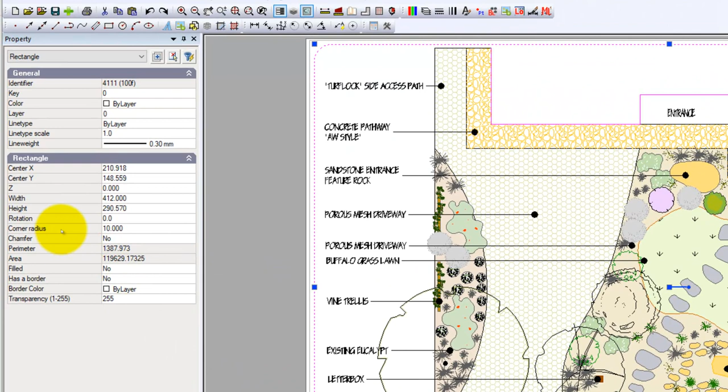You might want at a later stage to make that color 255 so it disappears from view on the sheet. Let me demonstrate that. You could simply pick color 255 and the edge of the floating viewport won't show. And let me unselect, or what I have done here is just put a rectangle with a corner radius, and I've given it a thickness of 0.3 millimeters on that sheet.

Now let's go back and select the floating viewport. Notice the view scale 68.11. It's not to scale, and we could pick a fixed scale, and if I picked a fixed scale of say 50, it's going to magnify the view and we will lose what we want. So this A3 sheet, this is how we want to lay the drawing out, but it's not going to print to a fixed scale.

In most parts of the world that use the metric system, your scales should be 1 to 50, 1 to 100, 1 to 200 and 1 to 500. Just don't have these odd scales because it makes no sense. But we can print this drawing accurately to a fixed scale by simply using a different size sheet. So I went to Format, Layout, and I created a sheet which is A2 in size.

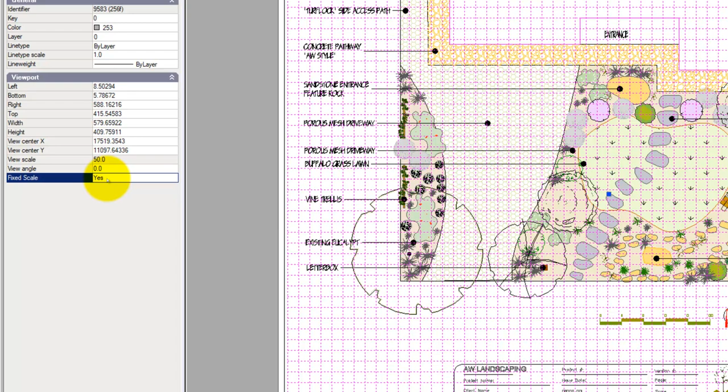Let me just select the tab and go to the Layouts Manager and see here it's an A2 sheet. So we're viewing now an A2 sheet, not an A3, and I'll do the same as I did before. Pick the grey outline there, and notice here it's a view scale of 50. So we can say, do we want to print it as a fixed scale? And the answer is yes, and now we can print it.

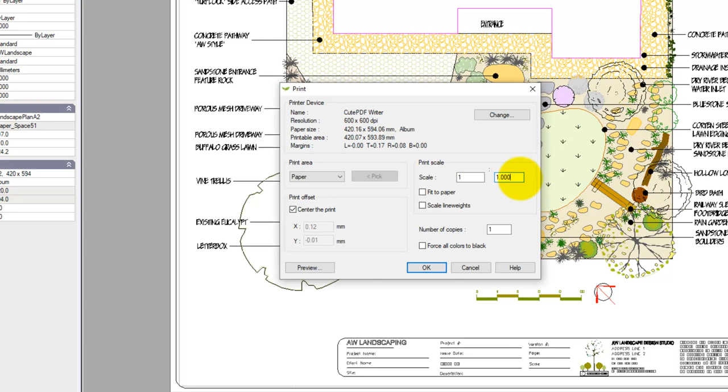So let's go File and Print, and I've set as my printer a CutePDF Writer, but there are a number of other PDF writers you could use. Notice that I've got Fit to Paper ticked at the moment, and the scale says 1 equals 1004. We want it fixed scale, so we take that off. We're now going to print 1 to 1, so print directly onto an A2 sheet, and it will give us exactly a scale of 1 to 50.

So it's now printing, and we'll put it on the desktop as gCADPlus drawing, and we'll save it. I've done a test, and let's now go to the desktop and open that gCADPlus drawing. Here it is, and I'll open it with Adobe Acrobat, and there's our nicely produced drawing.

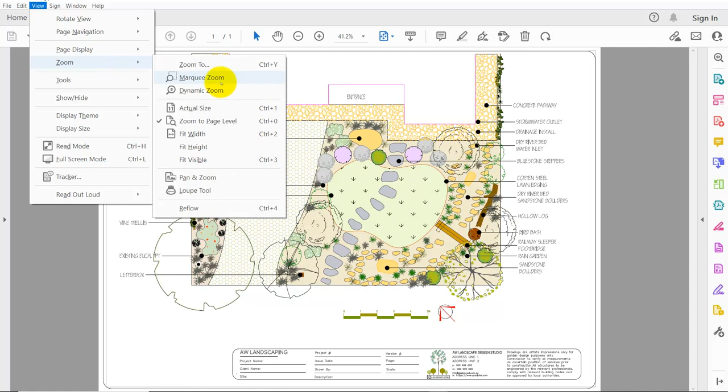Sorry for emails coming in. I'll go full size here, and because it's a PDF file, it's written at high resolution, and we can go View, Zoom, Marquee Zoom, and just zoom in, and you can see the very fine level of detail that we've got in this print. So it's very easy to print to a fixed scale.

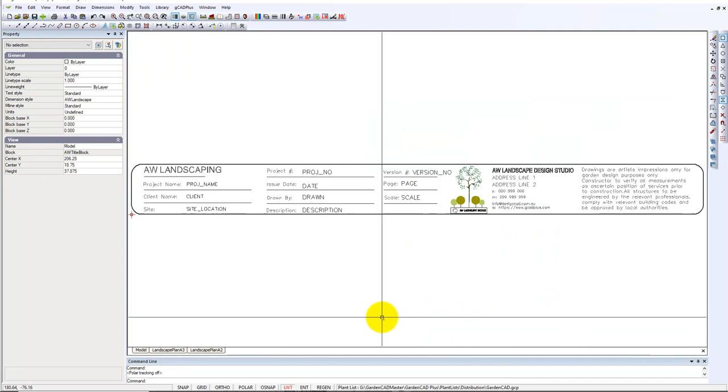So we could go back now into gCADPlus and dive back into, no, not modelspace. I want to now dive into the title block in there, and I can edit it, and so we can now overtype this, and I've said here enter the scale, e.g.

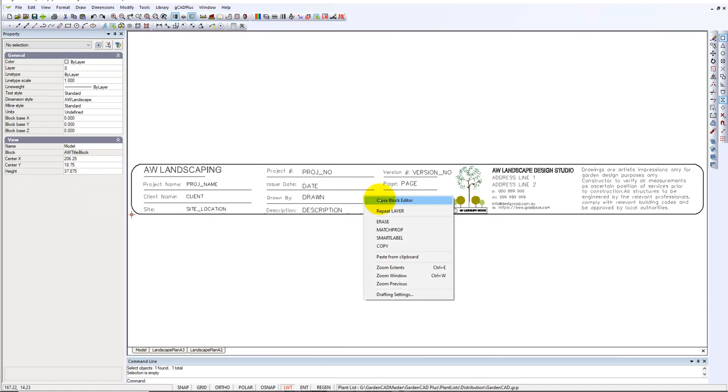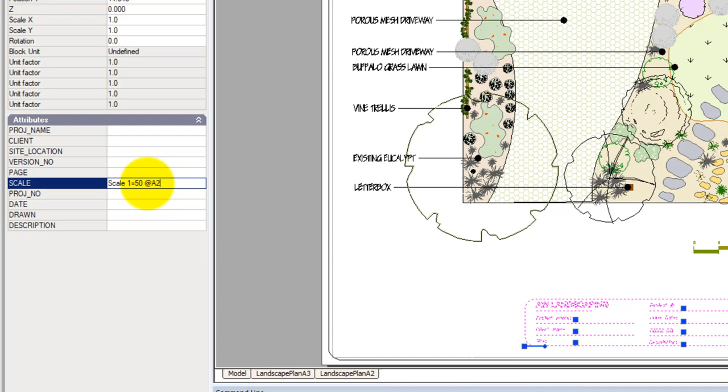Oh no, just scale 1 to 50 is scale, and at A2. We just hit enter, and that should now populate that. So here it goes in here. We could quite possibly alter that text in there. It's a bit spaced out, isn't it? And we could improve on that just a little, or change our title block just a little more.

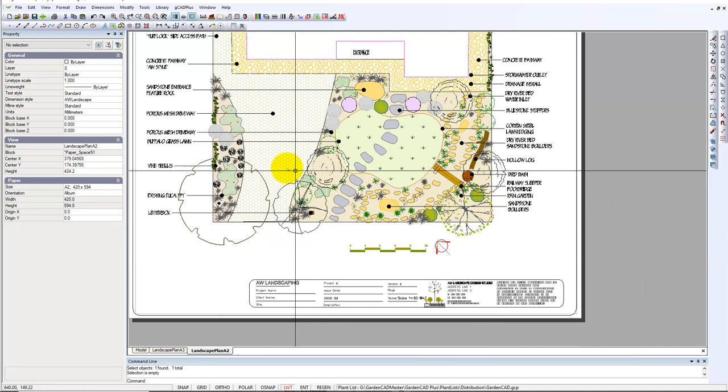So we now can print and we can edit the title block. Now, if we come back to the model here, and we use our quick way of printing, or we can do it from here. If we go File and let me zoom Extents, and we go File and Save as a PDF, that doesn't give you any ability whatsoever to print to a fixed scale. That box that we just saw doesn't pop up.

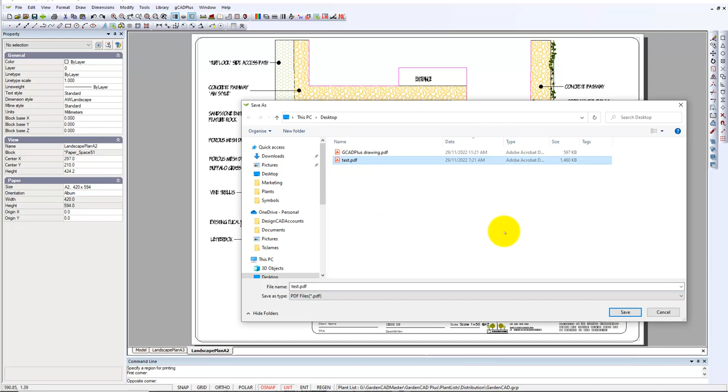We can do a version of it, and let's do it, window it with maximum resolution, and we'll just put a box around and print. This time I'll call it a test PDF drawing. So it's been generated in a different way, not through a PDF writer. The resolution will be reasonable, but not of the same quality as you get when you use the

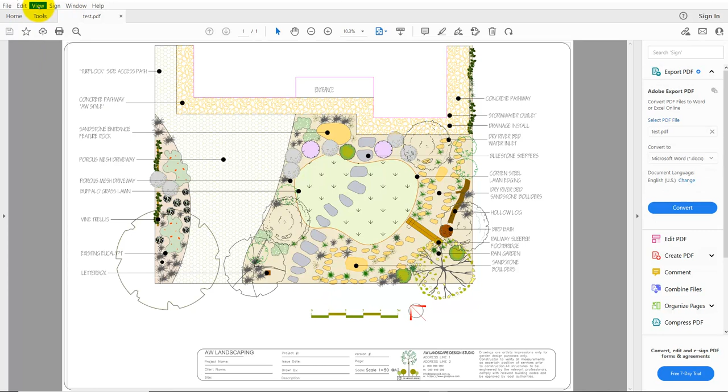direct print PDF. So if we go in here, view and zoom and marquee zoom, and come in here, we've got reasonable resolution, and that will work quickly, but it doesn't print to a fixed scale. So that's why it is important to include in model space some sort of direct scale.

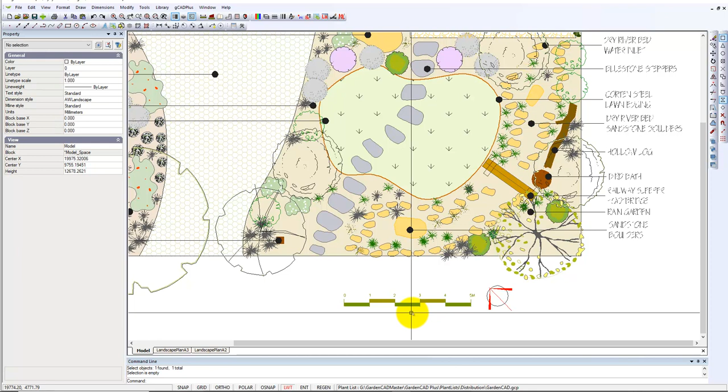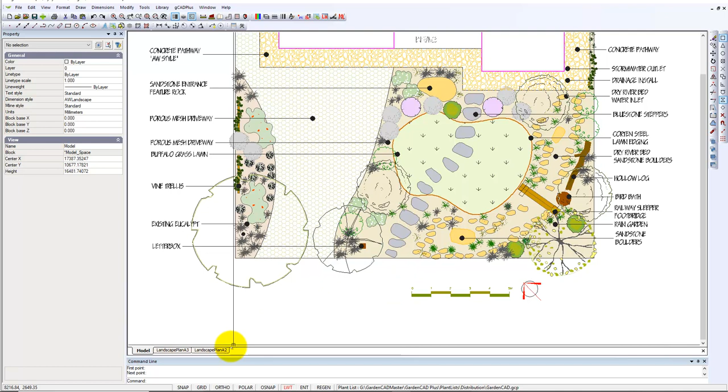So here, I've brought in one from the gCADPlus details area, and if we use the distance tool and say what's the distance, remember we're going full size now, we're in model space, from there across to there, and there's 5 meters. So no matter how you print your drawing, if you always include a scale bar that's placed in model space within the view, any construction team worker who picks up the drawing, no matter what size it is, can in fact scale off if they need to. Of course, putting dimensions on is a much better way of helping your design team to work.

The other thing to mention, because it's been raised a lot, is I haven't got an A2 printer, how can I send this to my client? Well, you've generated a PDF print using either of those methods, and that can be sent. And if you've got an A3 printer attached to your computer, you can still print this to an A3, but as long as it's got that scale information on it, then you can be confident that someone won't look at the wrong piece of paper and scale off. So you've got an internal scale.

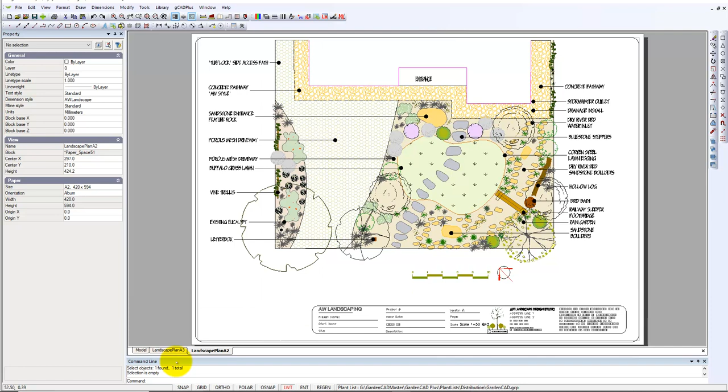I'm sorry that's so muddly, but so many people ask, they want to be able to print accurately, and we've had people getting technical rulers out and printing and checking in the print box. They sort of don't believe that it can be done, but if you follow those simple rules, it will be accurately printed at a fixed scale. So don't be frightened if it won't work on your sheet, just do another layout sheet.